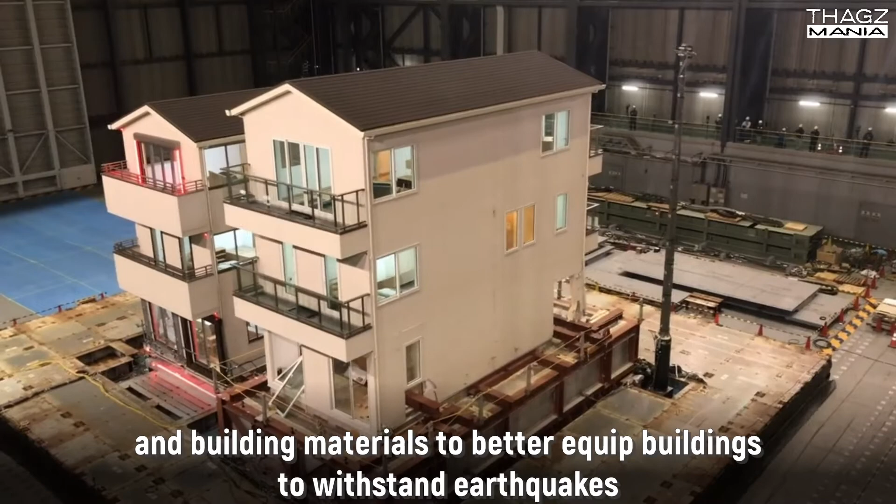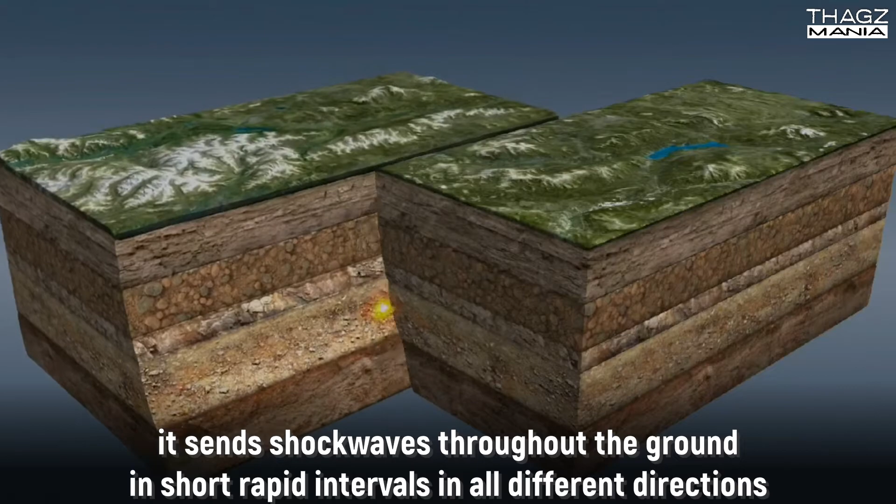But before we look at the earthquake-proof features of these buildings, we better understand first how earthquakes impact man-made structures. When an earthquake occurs, it sends shockwaves throughout the ground in short, rapid intervals in all different directions. While buildings are generally equipped to handle vertical forces from their weight and gravity, they cannot handle side-to-side forces emitted by these quakes. This horizontal load vibrates walls, floors, columns, beams, and the connectors that hold them together.

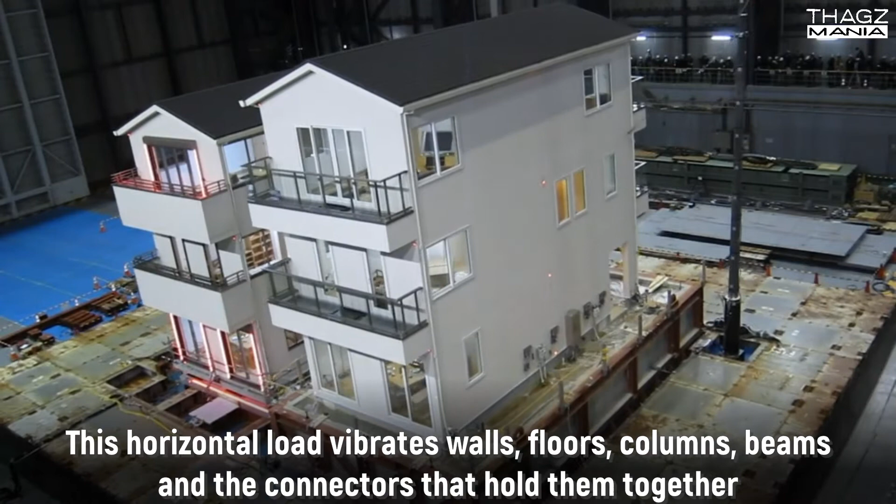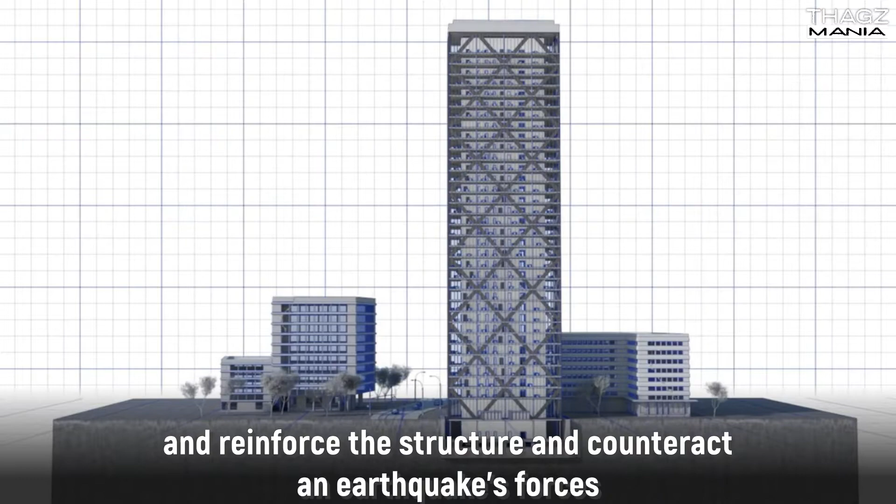The difference in movement between the bottom and top of the building exerts extreme stress, causing the supporting frame to rupture and the entire structure to collapse. To counter these forces, engineers design earthquake-proof buildings that reinforce the structure and counteract an earthquake's forces. Since earthquakes release energy that pushes on a building from one direction, the strategy is to have the building push the opposite way. Here are methods that engineers use in designing an earthquake-proof building.

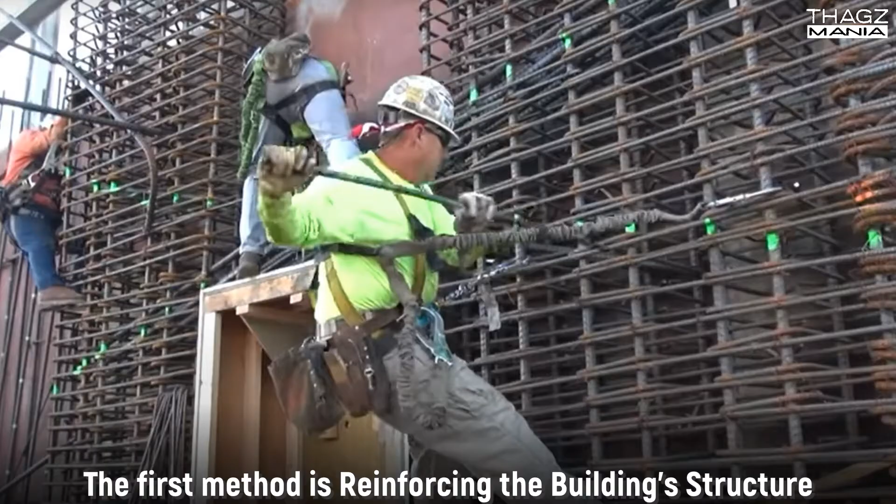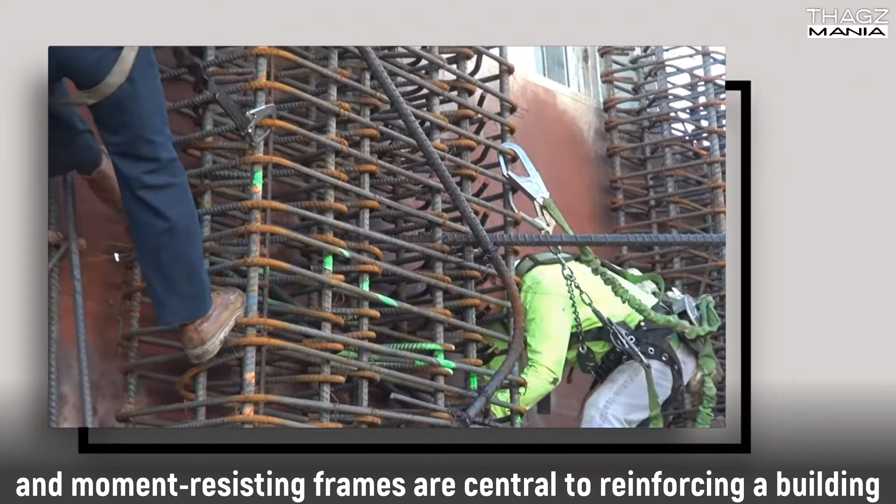The first method is reinforcing the building's structure. Para hindi mag-collapse, buildings need to redistribute the forces that travel through them during a seismic event o lindol. Shear walls, cross braces, diaphragms, and moment-resisting frames are central to reinforcing a building. Shear walls, o yung mga pader na buhos, are a useful building technology na tumutulong para mag-transfer ng earthquake forces and help a building keep its shape during movement.

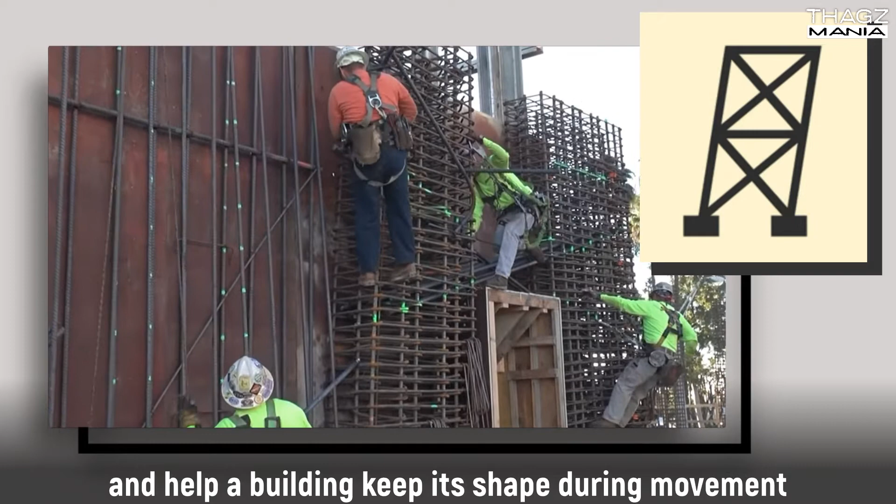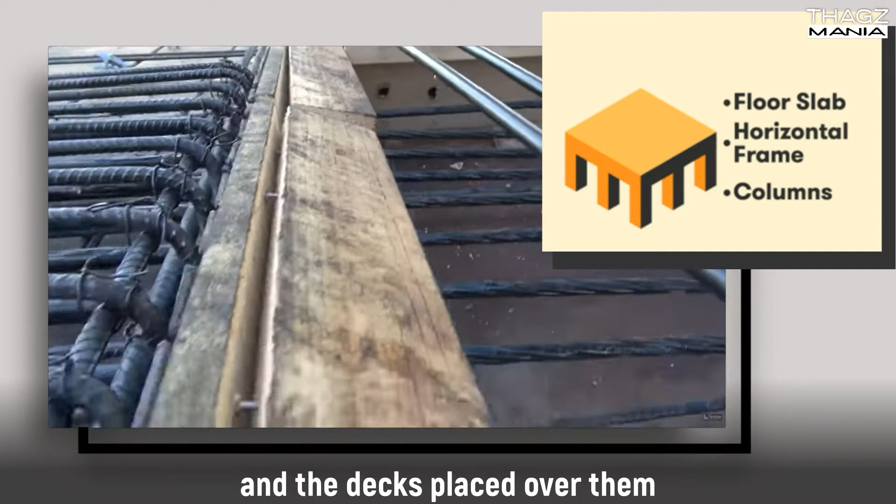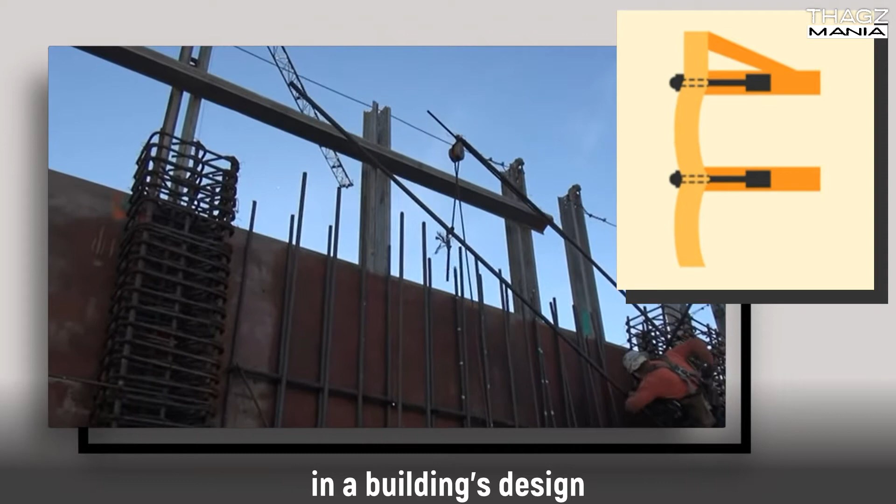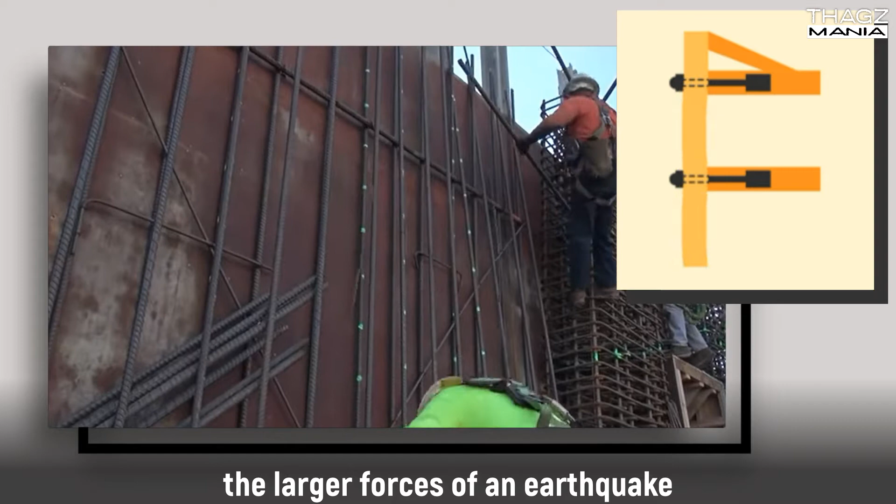Diaphragms, o yung mga slab, are a central part of a building's structure. Consisting of the floors of the building, the roof, and the decks placed over them, diaphragms help remove tension from the floor and push force to the vertical structures of the building. Moment-resisting frames provide more flexibility in a building's design. They are placed among the joints of the building and allow the columns and biga to bend while the joints remain rigid. Thus, the building is able to resist the larger forces of an earthquake, o lindol, while allowing designers more freedom to arrange building elements.

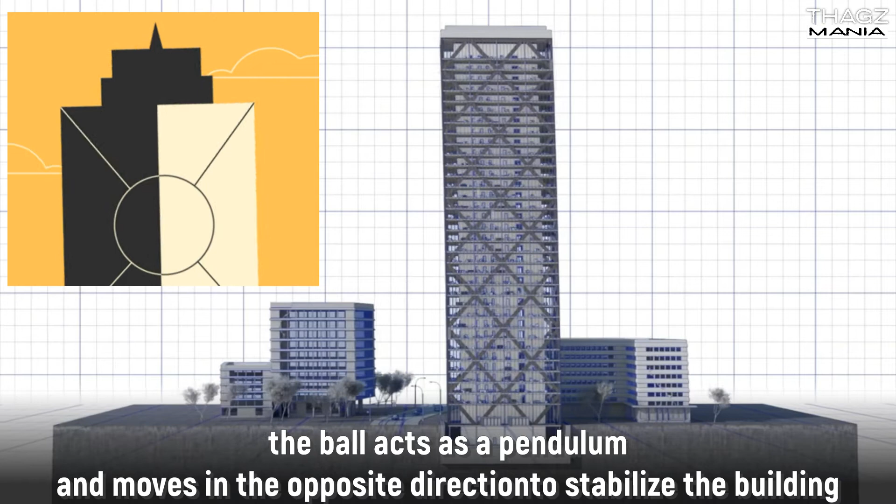The second method is pendulum power. This is a damping method used primarily sa mga skyscrapers. Engineers suspend a large ball with steel cables with a system of hydraulics at the top of the building. When the building begins to sway, the ball acts as a pendulum and moves sa opposite direction to stabilize the building. Like damping, these features are tuned to match and counteract the building's frequency in the event of an earthquake or lindol. The best example ng ganitong building is the Taipei 101.

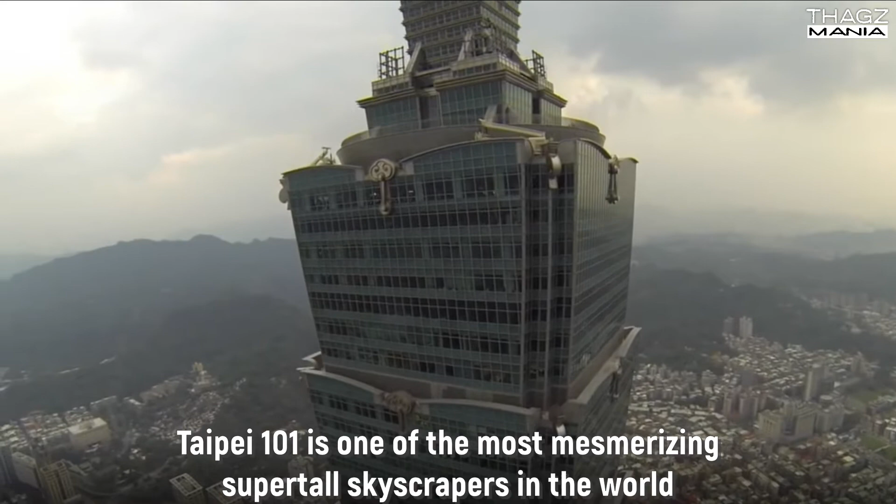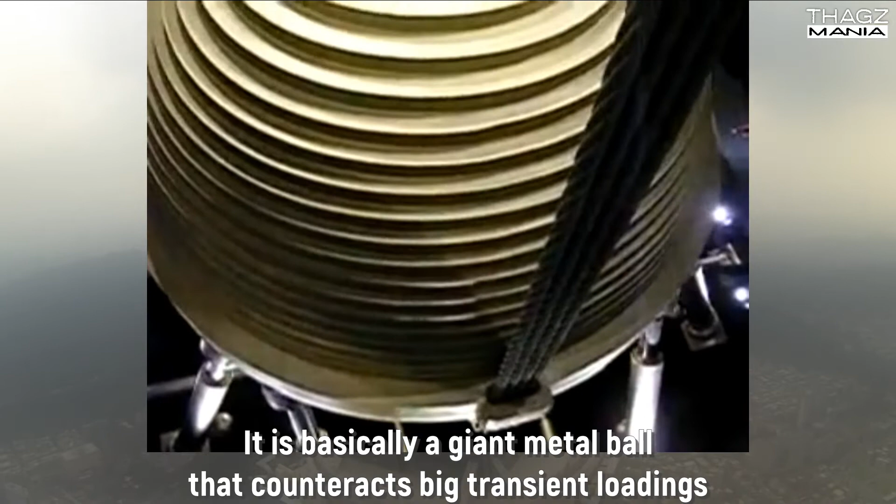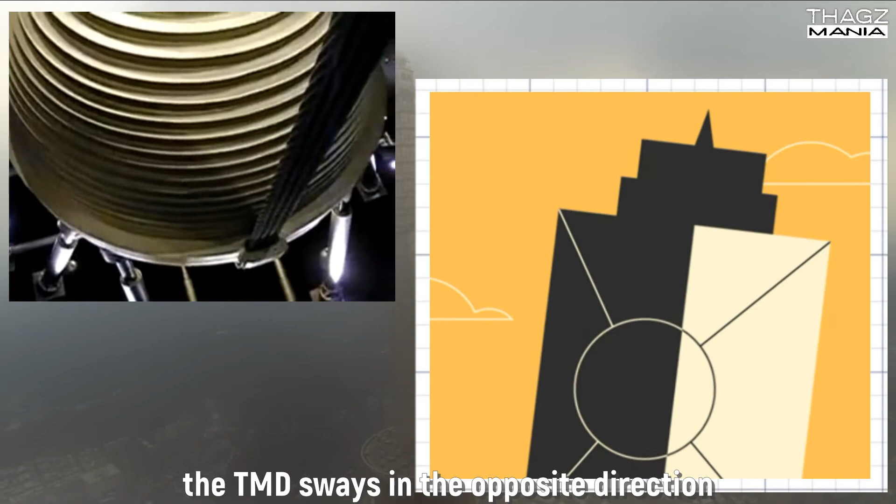Taipei 101 is one of the most nakakamanghang skyscrapers in the world. It houses the biggest tuned mass damper, or TMD, in the world. It is basically a supergiant metal ball that counteracts big transient loadings like wind and earthquakes to reduce the galaw of the tower. The TMD is supported by hydraulic damper arms and bumper systems, which function like the shock absorber of a car. When large forces act upon the tower, the TMD sways in the opposite direction, bringing the entire building into equilibrium by damping out the transient forces using the ball's mass.

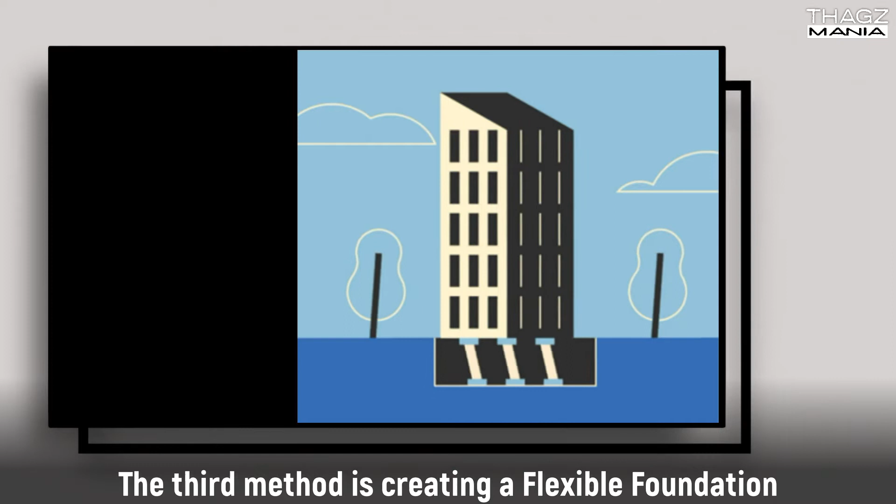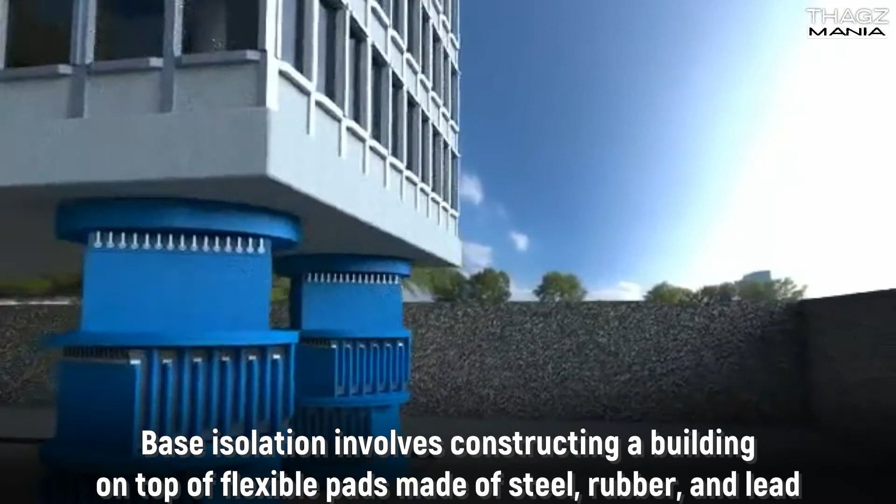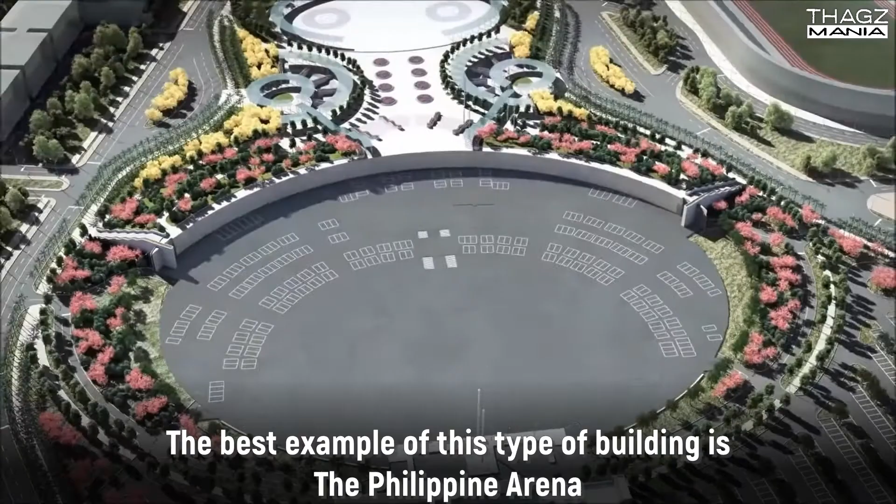The third method is creating a flexible foundation. One way to resist ground forces is to lift, o paangatin, the building's foundation above the earth. Base isolation involves constructing a building on top of flexible pads made of steel, rubber, and lead. When the base moves during lindol, the isolators vibrate while the structure itself remains steady. This effectively helps to absorb seismic waves and prevent them from traveling through a building. The best example of this type of building is the Philippine Arena.

The Philippine Arena is the world's largest domed arena with a seating capacity of 55,000, and is an amazing lindol-proof structure. It is also the centerpiece of the tourism enterprise zone called Ciudad de Victoria in Bulacan, Philippines. The Philippine Plate sits along the so-called Pacific Ring of Fire, home of the world's most notorious and active chain of earthquake fault lines. Philippine Arena's vast stadium roof, spanning 170 meters, was engineered to withstand severe transient loadings such as lindol, malakas na hangin, and bagyo.

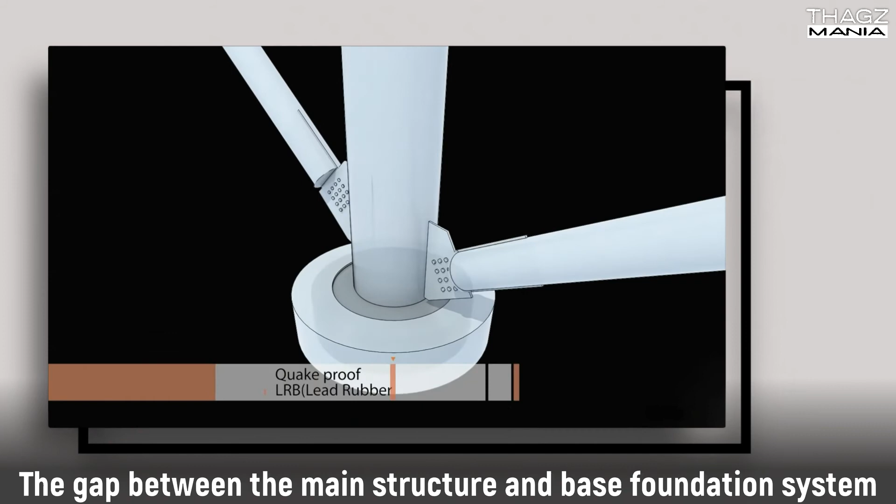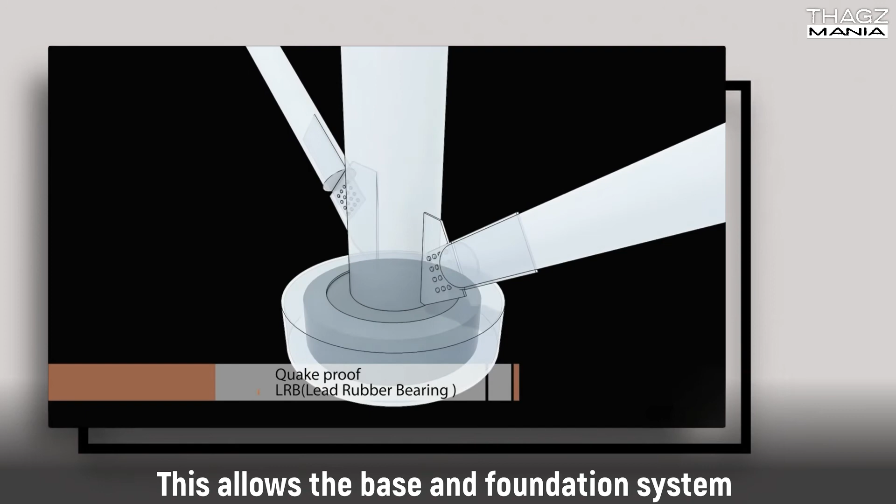The main structural body of the arena is isolated from its base and foundation, like yung parang manananggal, naka-separate yung katawan sa paa. The gap between the main structure and base foundation system is composed of lead rubber bearings, or LRB, which are a flexible arrangement of materials with high energy dissipation properties. This allows the base and foundation system to freely move habang lumilindol, while the top structure remains stationary.